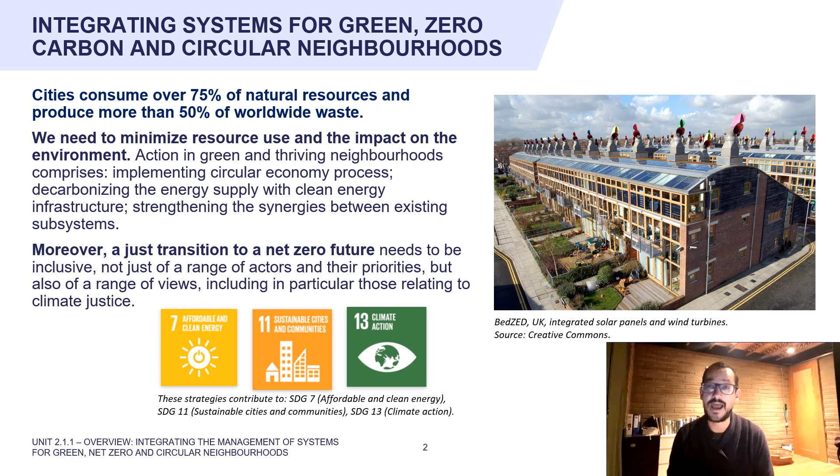This overview provides tools to catalyze change with circular economy processes at the neighborhood scale, design and plan net zero carbon neighborhoods, and leverage digitalization opportunities to reach net zero targets with solutions for the urban poor.

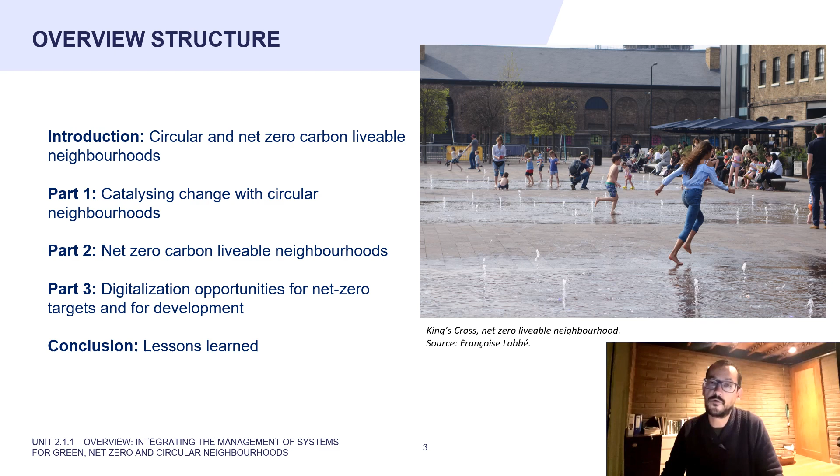Introduction: Circular and net zero carbon neighborhoods.

Driven by a culture of production, consumption, and disposal, resources flow in and out of neighborhoods in an exploitative and unsustainable linear model. The circular economy model is an alternative to this take-make-waste system. It is regenerative and restorative by design, keeping resources in use at the highest value for as long as possible.

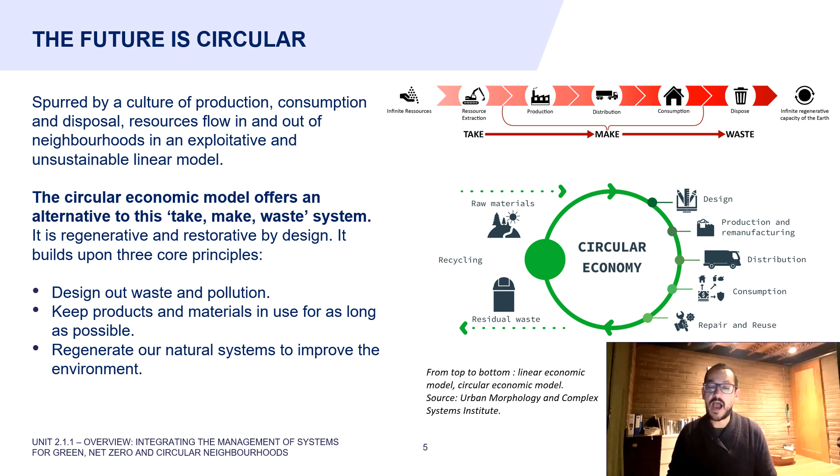It builds upon three core principles: designing out waste and pollution, keeping products and materials in use for as long as possible, and regenerating our natural systems to improve the environment.

Planning and design can enable circularity and resource efficiency gains. Synergies between distributed infrastructure in neighborhoods, for example localized small-scale energy, water, and food systems, etc.

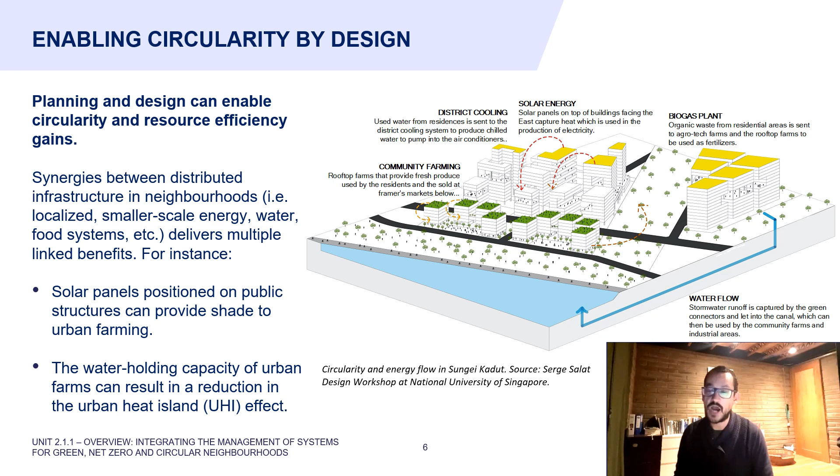Delivers multiple linked benefits. For instance, solar panels positioned in public structures can provide shade to urban farming. The water holding capacity of urban farms can result in a reduction of the urban heat island effect. These cross-sectoral optimizations are shown on a project in Singapore.

The world has a goal to reach net zero emissions. Net zero means cutting greenhouse gas emissions to as close to zero as possible, with any remaining emissions reabsorbed from the atmosphere by oceans and forests, for instance.

A green and thriving neighborhood will aim to minimize operational, embodied, and consumption-based emissions. Operational emissions continually occur throughout the lifetime of the neighborhood. They include emissions due to energy used in buildings, public spaces, and transportation, or emissions arising from processing waste.

Embodied emissions arise from the materials and construction processes of buildings and infrastructure, including new construction, retrofits, and redevelopment. Consumption-based emissions come from goods and services as the people in the neighborhood buy food or clothes, travel on holiday, or invest in new technology.

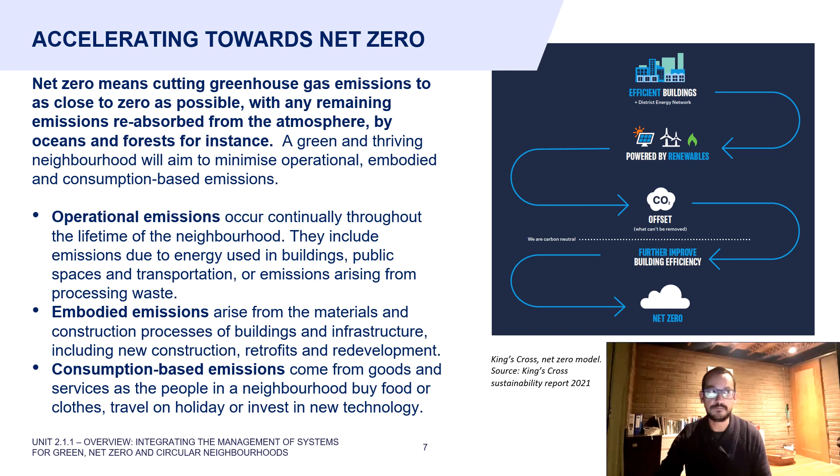To achieve net zero, circular, and livable neighborhoods, the focus should become places, not only buildings. King's Cross Central in London, for example, announced on the 11th of November 2021 that it has become net zero.

This place for people is designed according to human scale, with variety and a sense of place and belonging. Places like King's Cross Central offer a variety of uses and engage with communities. They are better placed to reach net zero and respond to challenges arising from climate risk, lifestyle trends, technology, and social inequalities.

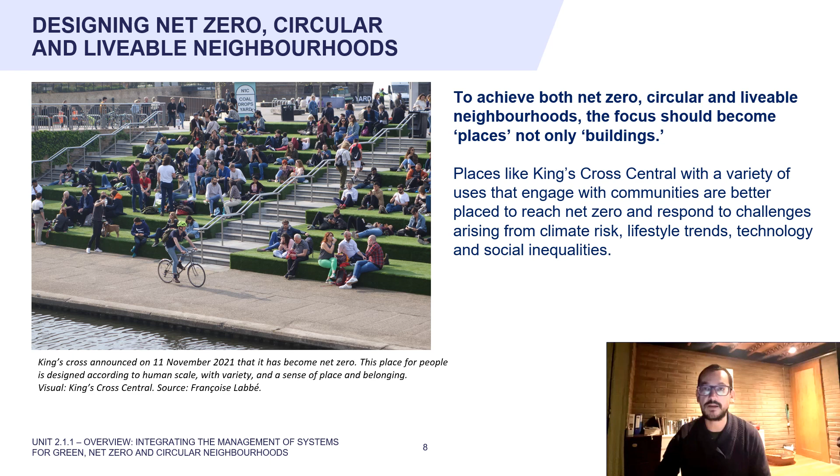Part 1: Catalyzing change with circular neighborhoods. In circular neighborhoods, like Hammarby Sjöstad in Sweden, the heating, transport, and waste collection systems work in conjunction to reduce their long-term use of energy and resources.

Hammarby Sjöstad demonstrates how high environmental targets can be met through the use of a well-developed master plan, high levels of initial investment in infrastructure, and a focus on environmentally-friendly housing and high-quality living environments.

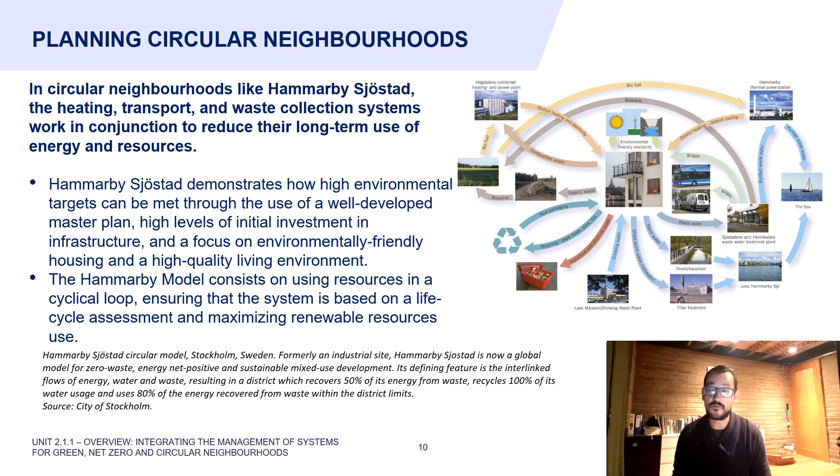The Hammarby model consists of using resources in a cyclical loop. It ensures that the neighborhood systems are based on a life cycle assessment and maximize renewable resource use. Thanks to the interlinked flows of energy, water, and waste, the district recovers 50% of its energy from waste, recycles 100% of its water use, and uses 80% of the energy recovered from waste within the district limits.

In circular communities, spatial planning ensures proximity between production and population. Hence, planners ensure that the community's physical structure promotes the efficient reuse, collection, and distribution of resources to support circularity.

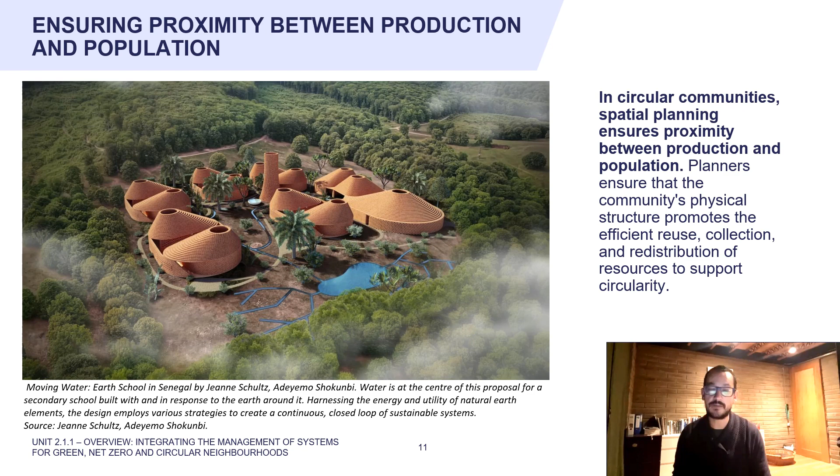In the Moving Water Earth School in Senegal, the project focused on water harvesting and distribution at the local level as needed. This design illustrates on-site management of natural resources.

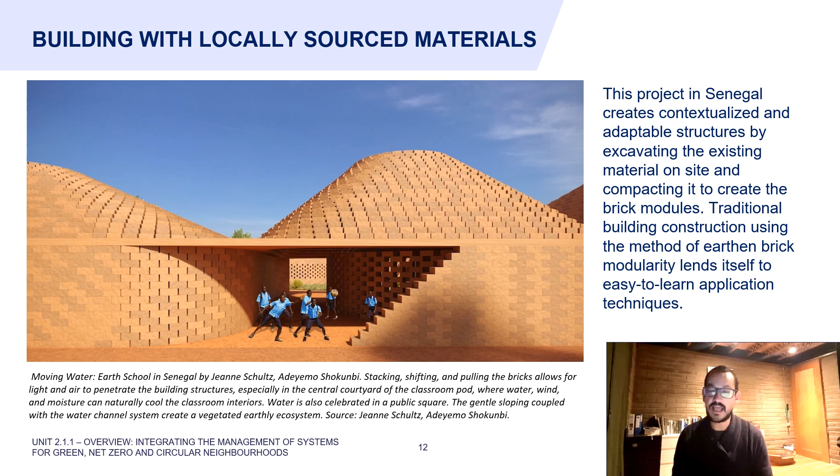This project in Senegal creates contextualized and adaptable structures by excavating the material on site and compacting it to create the brick modules. Traditional building construction using the method of earthen brick modularity lends itself to easy-to-learn application techniques.

The Circle City Scan tool developed by ICLEI aims to allow any local government to identify and prioritize circular opportunities for the city or region based on socioeconomic and material flow data.

The method comprises 4 phases. The first step maps material flows and added value. This provides insights into where and how to create opportunities for economic development.

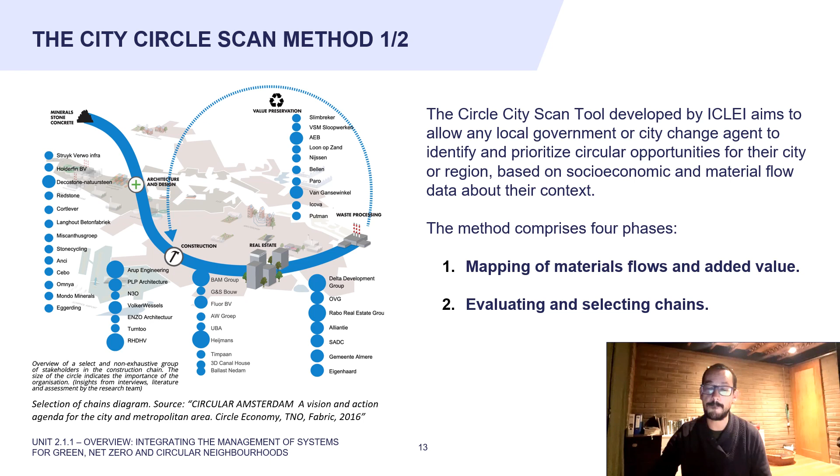The second step determines in which chain the actions can obtain the most important circular effect. The third phase explores how the identified chain can work in a circular future. In the fourth stage, an action program selects projects and formulates actions.

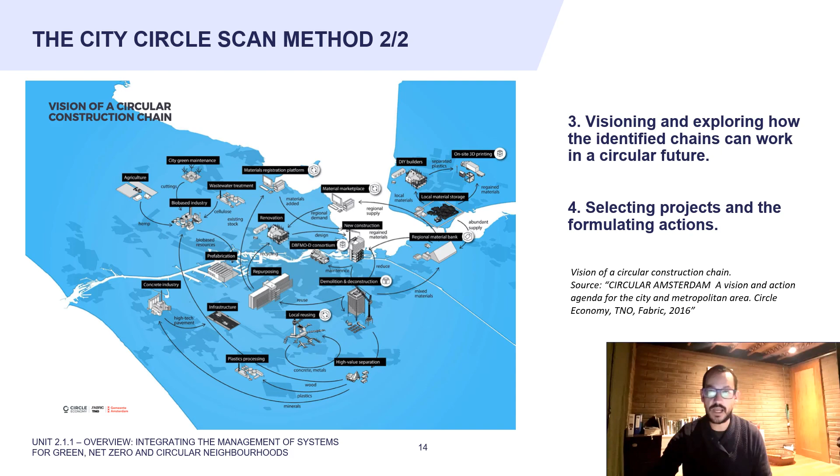Part 2: Net Zero Carbon, Livable Neighborhoods.

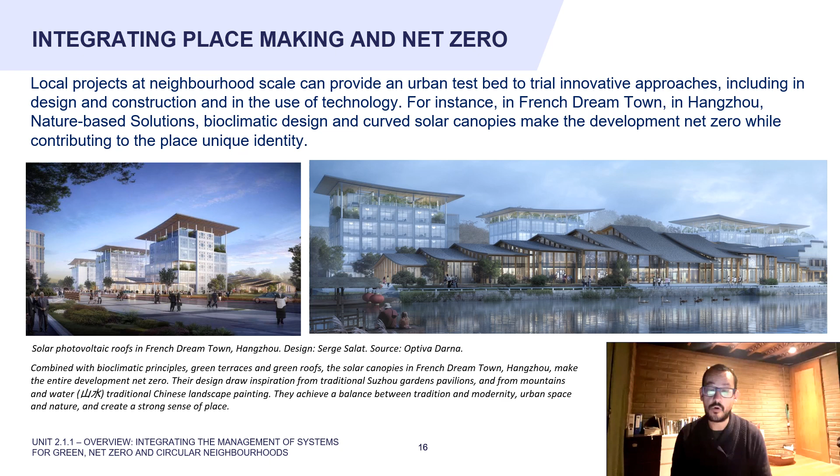Local projects at neighborhood scale provide an urban testbed to trial innovative approaches, including in design, construction, and the use of technology. For example, in French Dreamtown in Hangzhou, nature-based solutions, bioclimatic design, and curved solar canopy make the development net zero while contributing to the place's unique identity.

Net zero carbon can become a driving force for the generation of an architectural and urban planning project. King's Cross Central is a pleasant, nurturing neighborhood that fits into the context of the city and its surroundings through the use of sustainable and environmentally friendly design elements.

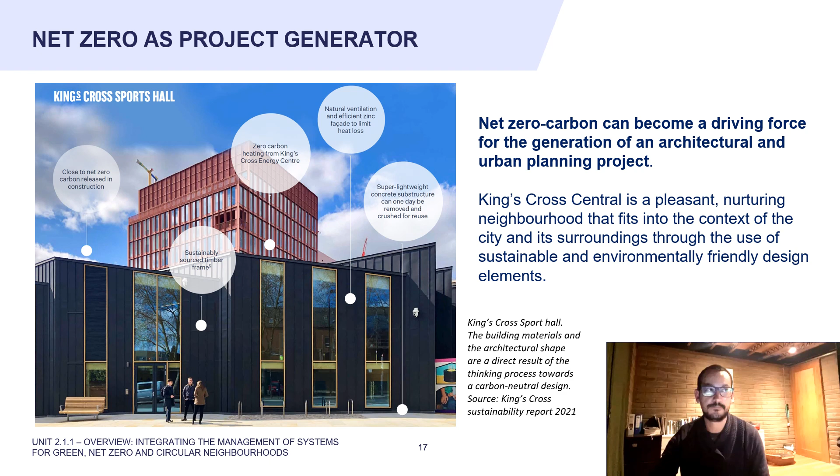To reach net zero, energy supply infrastructure should be strategically planned. It is more efficient when it is diverse, sized to expand and adapt if demand changes, and designed to accommodate local renewable energy generation.

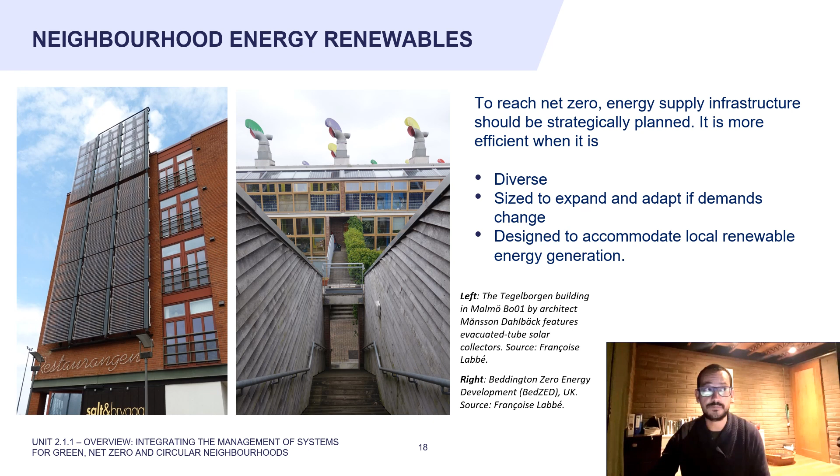Reducing CO2 emissions is a growing challenge for the transportation system. According to the World Bank, transportation produces roughly 23% of global CO2 emissions from fuel consumption. More alarming, transportation is the fastest growing consumer of fossil fuels and the fastest growing source of CO2 emissions.

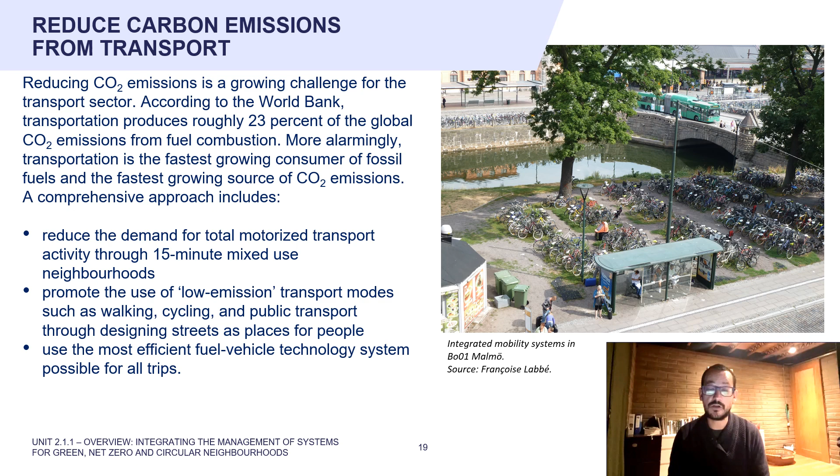A comprehensive approach includes: 1. Reduce the demand for total motorized transportation activity through 15-minute mixed-use neighborhoods. 2. Promote the use of low-emission transportation modes such as walking, cycling, and public transport. And 3. Use the most efficient fuel vehicle technology system possible for all trips.

Designing for net zero can be a livable and affordable option. BedZED in London, for example, was designed by its architect, Bill Dunster, to be zero carbon, protect the environment, and support a more sustainable lifestyle.

The project integrated environmental, social, and economic targets. Environmental targets included renewables such as biomass, a combined heat and power unit, and photovoltaics, zero net carbon emissions, integrated water conservation strategies, reclaimed materials, a green travel plan, and biodiversity measures.

Social targets included mixed tenure, two-thirds affordable or social housing, lower energy and water costs, community space, sports pitch, childcare facilities, a village square, and private gardens for most units.

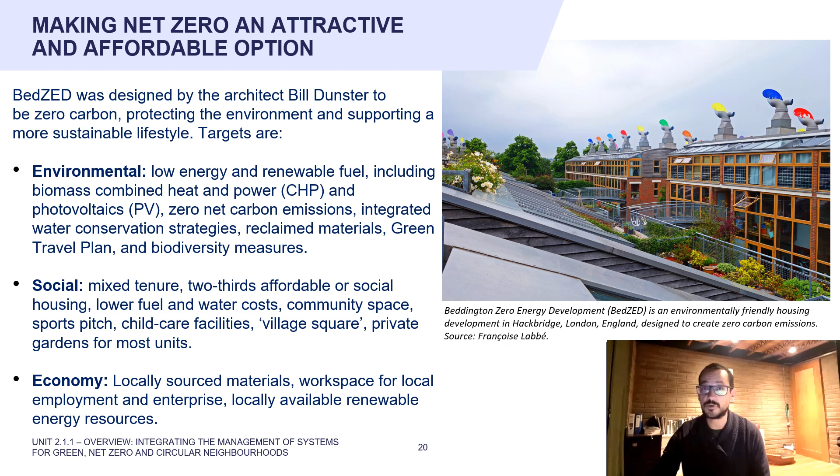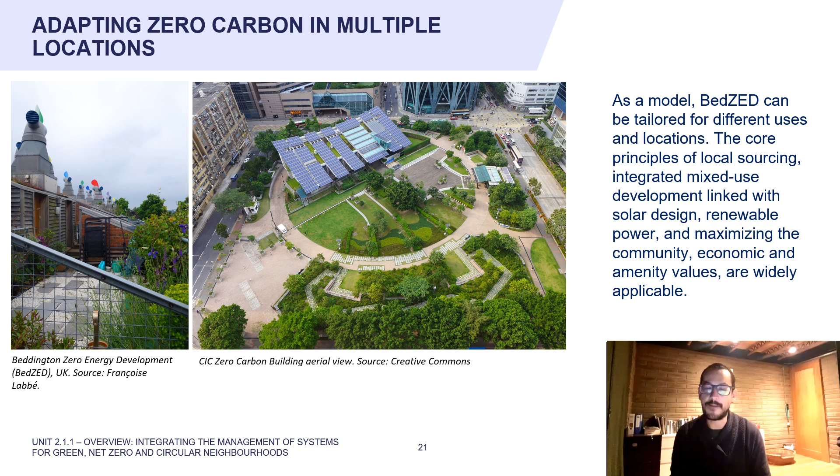Economic targets included locally sourced materials, workspace for local employment and enterprise, and local available renewable energy resources. As a model, BedZED can be tailored for different uses and locations. The core principles of local sourcing, integrated mixed-use development linked with solar design, renewable power, and maximizing community, economic, and amenity values are widely applicable.

Part 3: Digital opportunities for net zero targets and for development.

Digitalization brings multiple benefits to cities. It leverages synergies to meet net zero targets. It makes possible to do more with less by integrating different systems in real time. Connected applications put real-time, transparent information into the hands of users to help them make better choices. These tools can help save lives, prevent crime, reduce the disease burden, save time, reduce waste, and boost social connectivity.

However, measures to protect citizens' privacy and ensure data protection are essential.

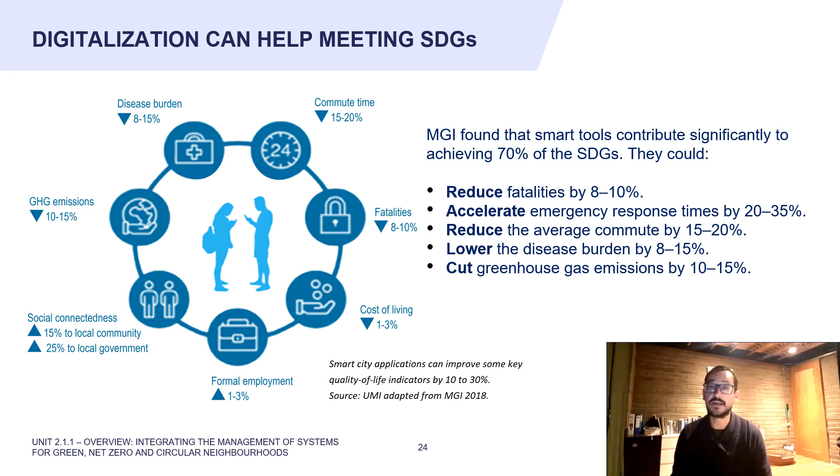McKinsey Global Institute found that smart tools could contribute significantly to achieving 70% of the Sustainable Development Goals. They could reduce fatalities by 8 to 10%, accelerate emergency response times by 20 to 35%, reduce the average commute by 15 to 20%, lower the disease burden by 8 to 15%, and cut greenhouse gas emissions by 10 to 15%.

Smart mobility tools can help cities decarbonize transportation and meet net zero goals. They include enabling electrification with smart grids, sharing with car share fleets, and enabling communication between vehicles and with broader transportation infrastructure.

Mobility hubs can be close to public transport and ride-sharing stops and offer secure bicycle parking, access to city bikes, and chargers for electric vehicles.

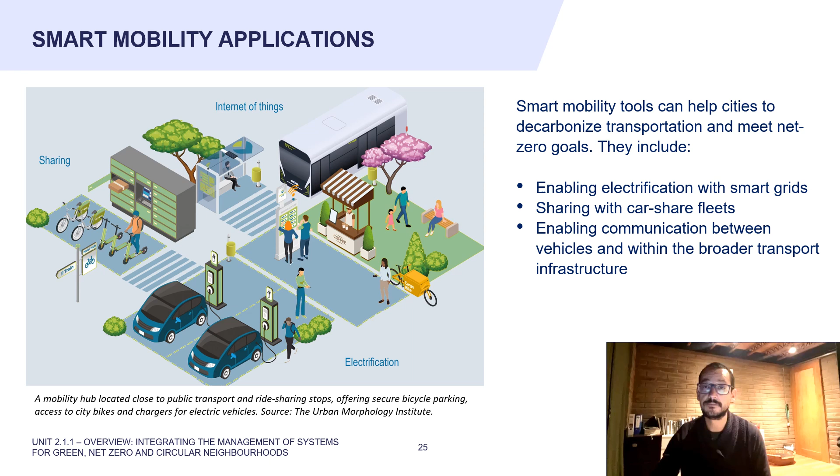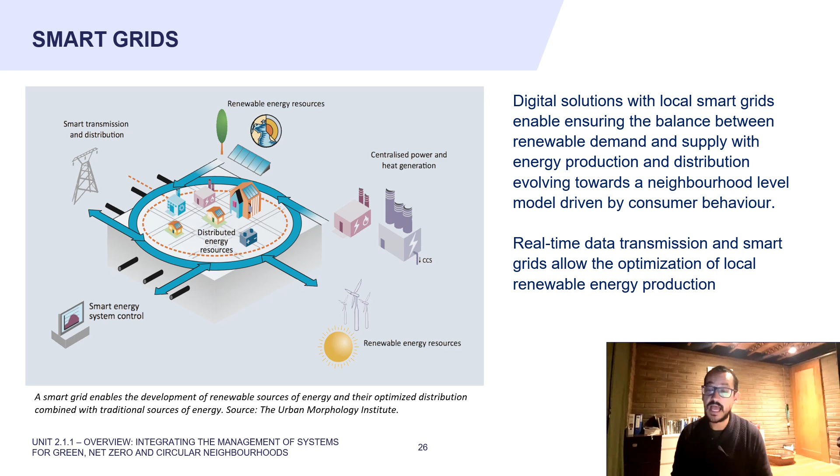A challenge of renewable energy today is to ensure the balance between demand and supply. Digital solutions enable energy production and distribution to evolve towards a neighborhood-level model driven by consumer behavior. Real-time data transmission and smart grids allow the optimization of local renewable energy production.

International examples in deprived communities show that digital solutions can accelerate more equitable and resilient growth. They help deprived communities meet their socioeconomic priorities through actions implemented at a neighborhood level, comprising digital financial services enabling access to basic neighborhood services, remote schooling, and more inclusive local government services. However, more than half of the Global South remains digitally unconnected, which requires community actions enhancing digital literacy.

With simple tools, digital technology can play a role in tackling urban poor challenges. Pay-as-you-go models are now unlocking a range of urban services for the urban poor, such as water, clean cooking gas, and sanitation. Although these are basic utilities, they are expensive in low-income settings. Therefore, it is necessary to create new business models to deliver them incrementally.

Moreover, digital delivery channel innovations produce usage efficiency. Digital financial services can also support workers with low levels of skills and literacy so that they enhance their livelihoods.